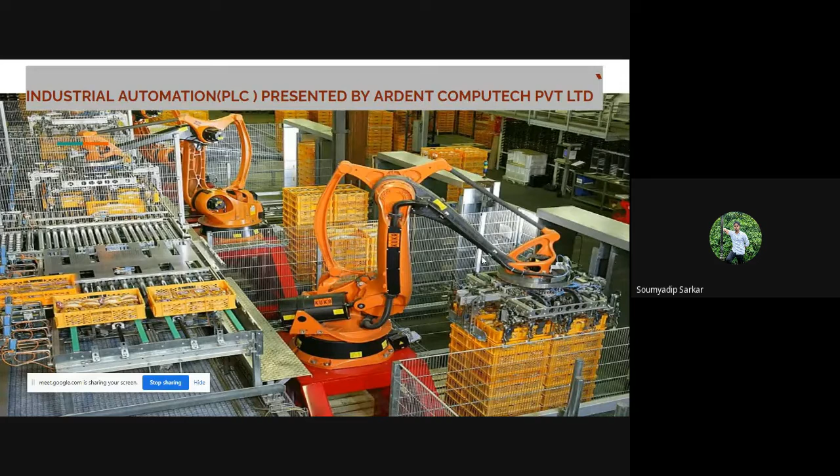So first tell me what you know about PLC. Let's discuss PLC first, then we'll jump into the later part, SCADA. What is SCADA? So tell me what you know about PLC. Does anyone have any knowledge about PLC? What are we about to study or get trained in this session?

You all know English, or should I communicate in another language, Hindi and Bengali? Are all of you comfortable with English?

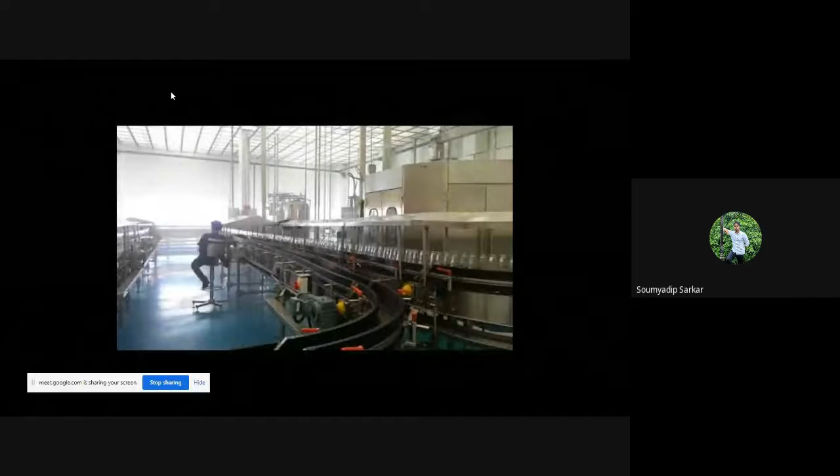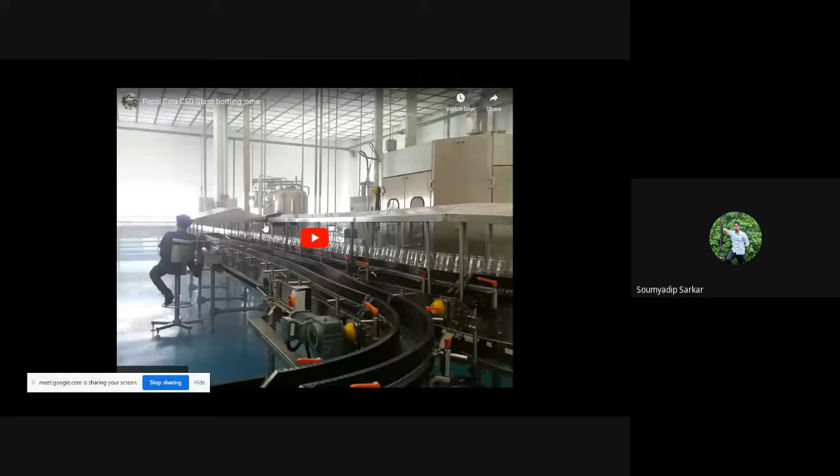Look very carefully. Here is one type of factory, and in this factory, the product is our Pepsi bottle. In this section, we see the empty bottles automatically getting filled first, then capped. By controlling this process, they use a PLC machine.

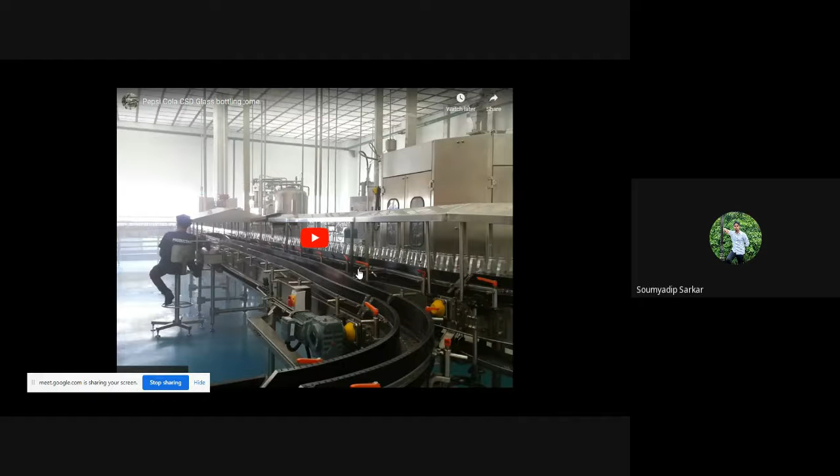First understand how that automation can be controlled, then we'll discuss why this machine is called a programmable logic controller. So first, see one type of automation: a Pepsi bottle getting filled and capped automatically.

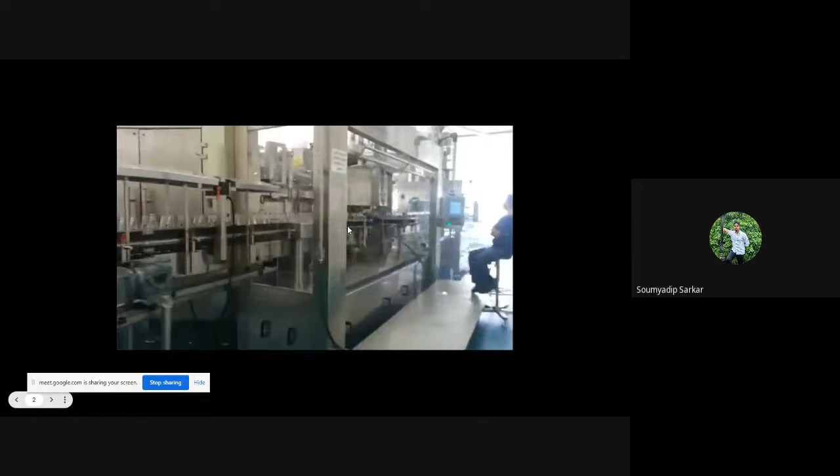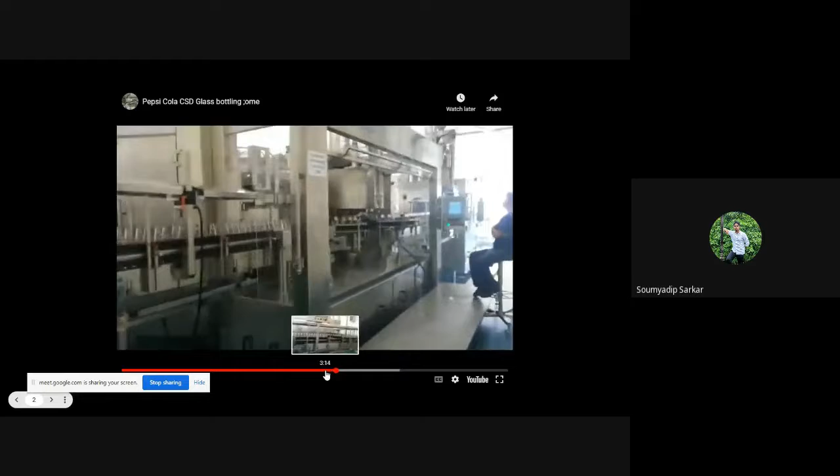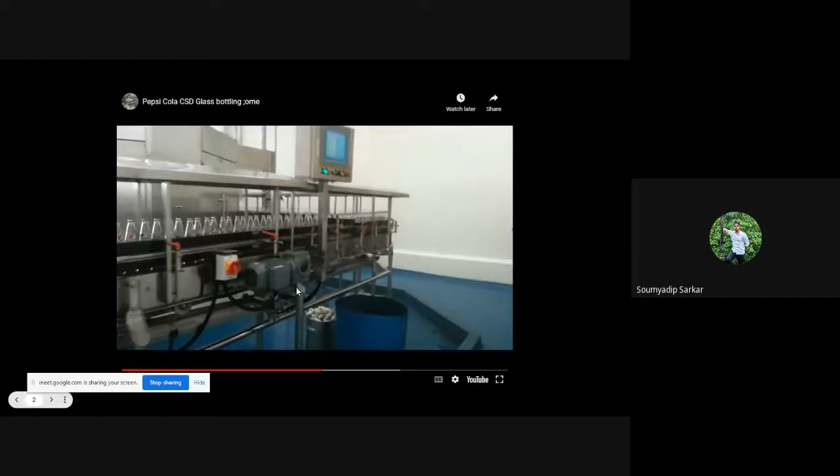What we are seeing here is a conveyor belt moving. That conveyor belt is moved with the help of installed motors. On that conveyor belt we have our empty bottles, and all the empty bottles go to the filling section.

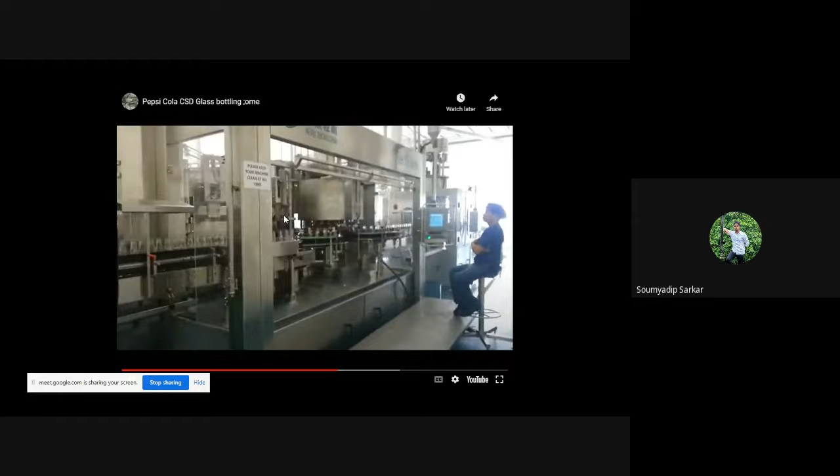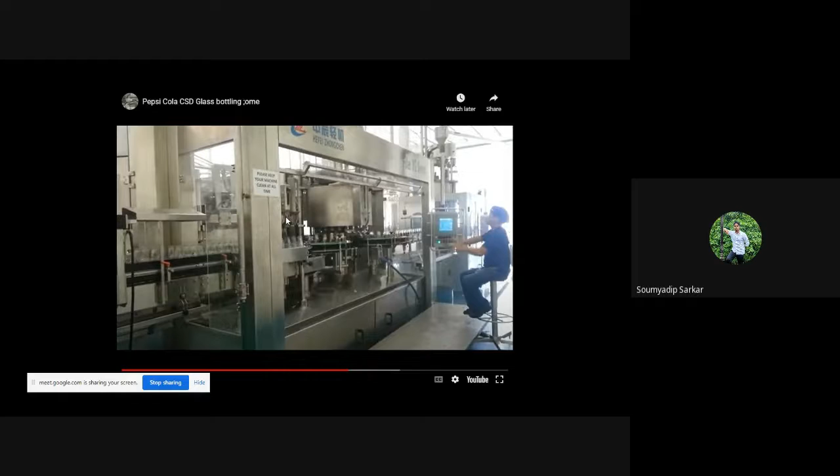First understand how they fill, then cap. All the process is done through automation, but it's actually carried out by machine—that's not entirely correct, since we have an observer who has the capability to change the input.

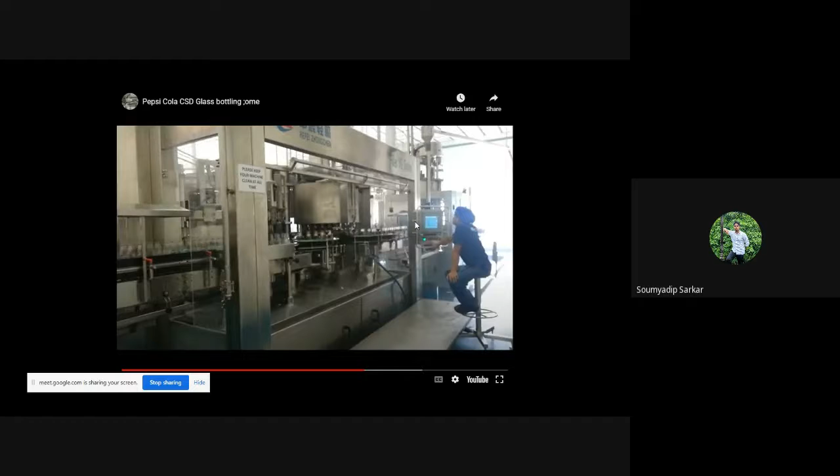This is called the HMI system, human machine interface. From that, they give input to change settings—suppose he needs to slow down the speed, he can control it.

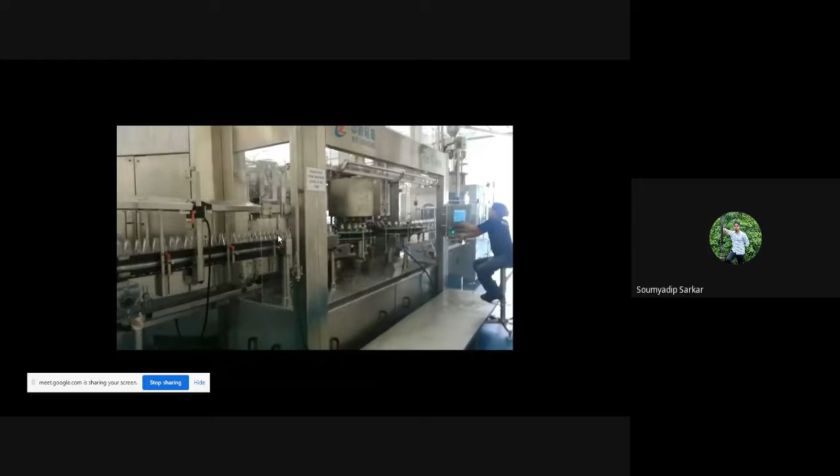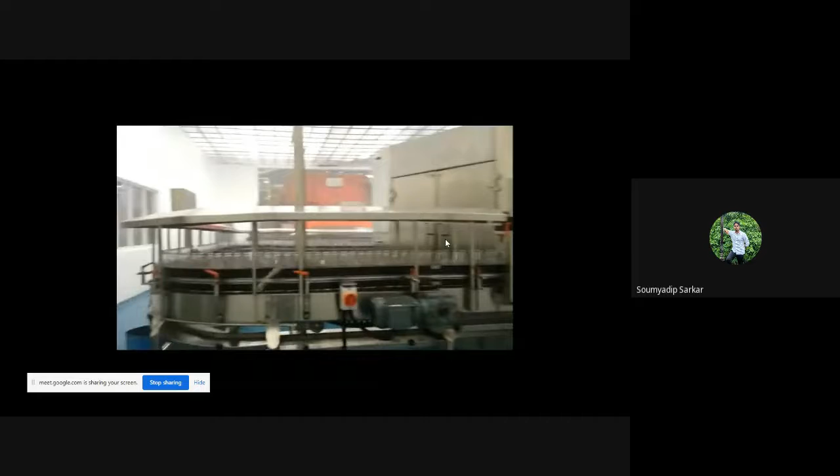Look carefully: all the empty bottles go to the filling section, and the filling section has the roundical process. They get attached to the filling section, and within one rotation they get filled, then go to the capping section. The capping section has one type of lever that moves up and down to cap them.

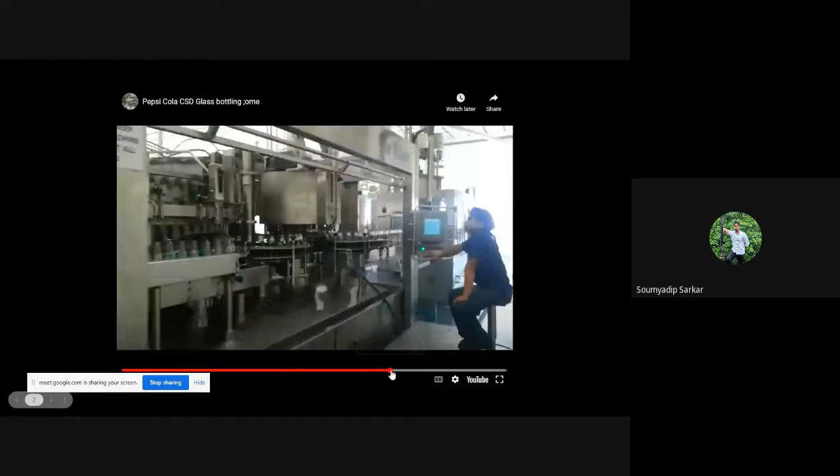So see this process: this is our conveyor belt, and this is the container. In this container we have our liquid, and on the outside of that container there are multiple filling sections that rotate.

All the bottles get attached to this filling section, and with the pressure set as needed, within one rotation they get filled. Then the filled bottle goes to the capping section, where a lever moves up and down to attach the cap.

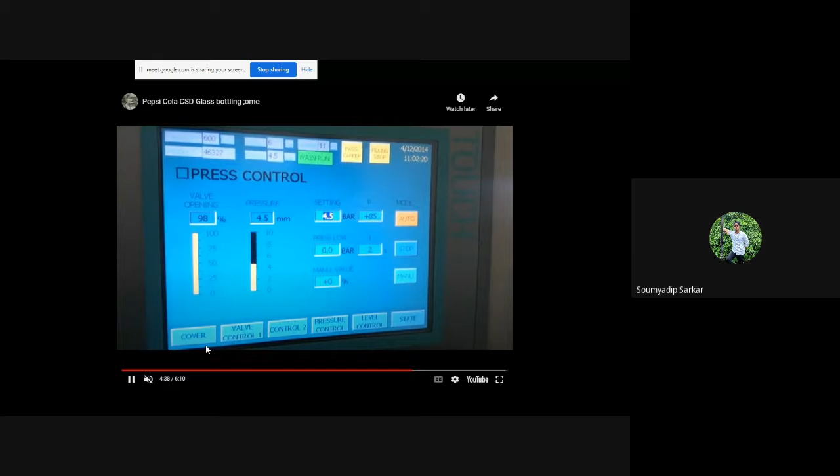So this is the controlling system. From this, you can control the valve, you can control the conveyor, and you can control the pressure as well.

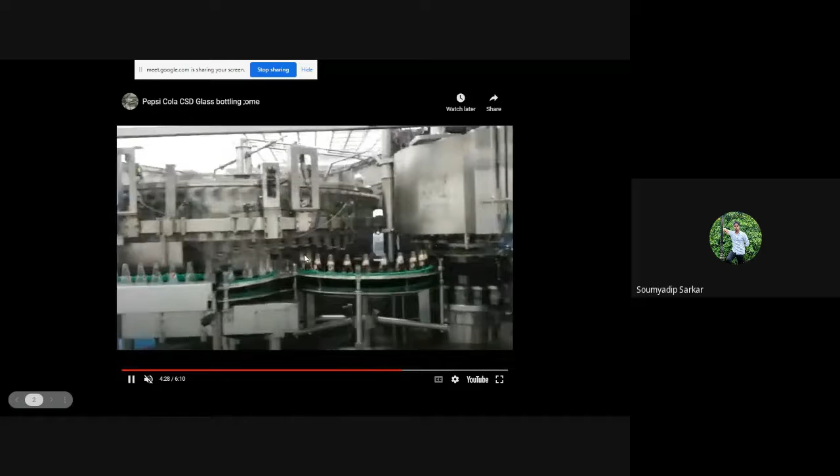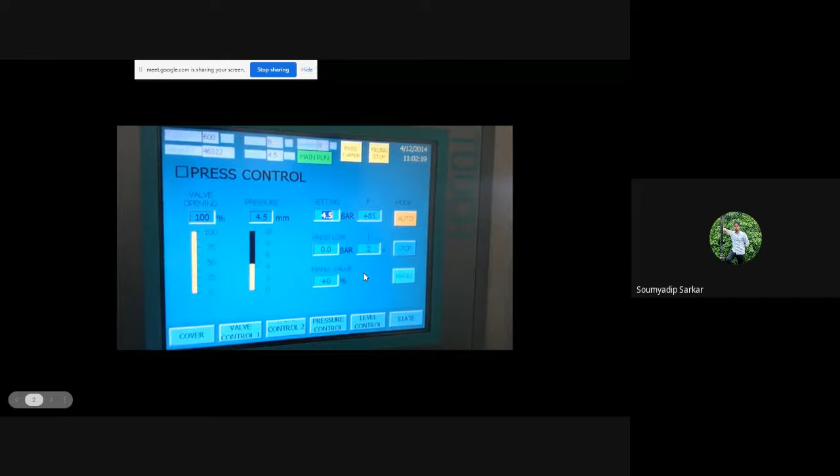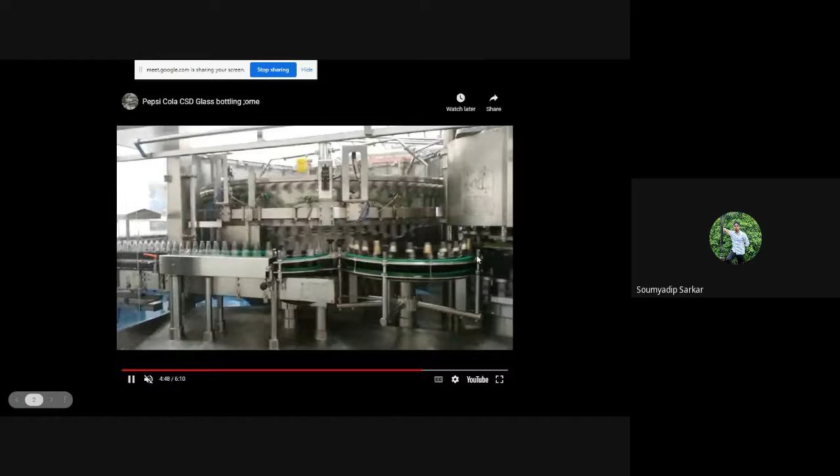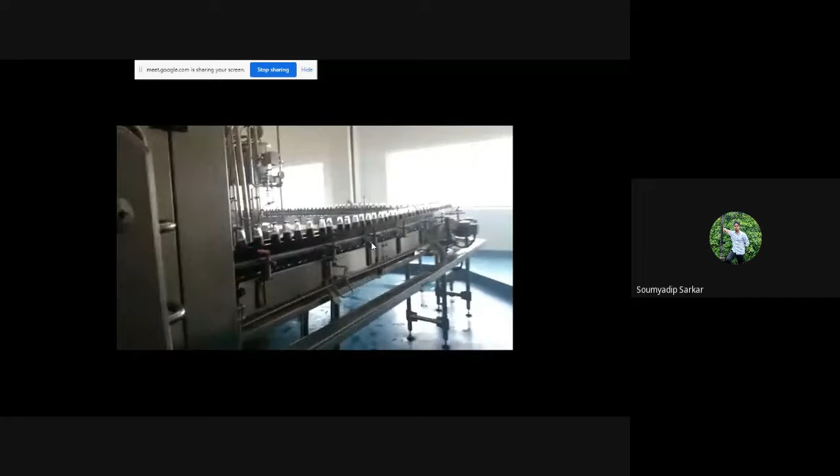Have you understood this process thoroughly? So then all the bottles go into the packaging section, they get filled and capped. If I created the same process manually, the product efficiency would not be as much as we have now. মানে, আমি যদি সেম প্রসেসকে মেশিনের সাহায্যে অটোমেটিক্যালি না করে ম্যানুয়ালি করতাম, তাহলে কি এতটা, ধরো 5 মিনিটে 1000 বা 500 খানা বোতল ভরা যেত ম্যানুয়ালি? না। So we need automation to gain our product efficiency, whatever is required there.

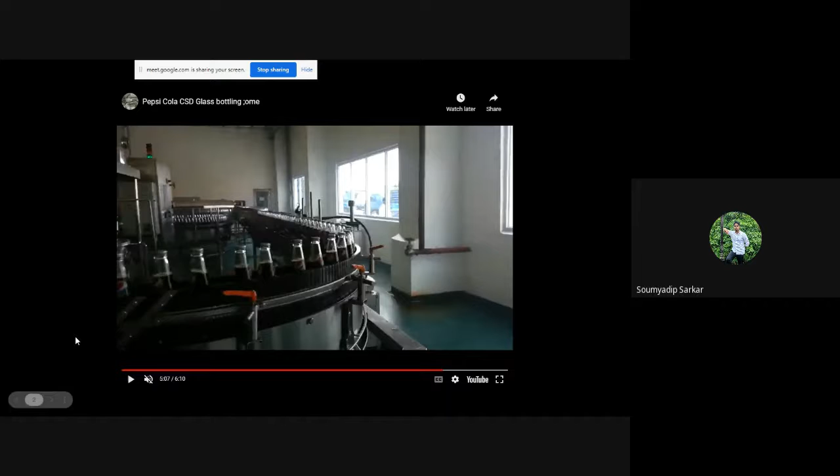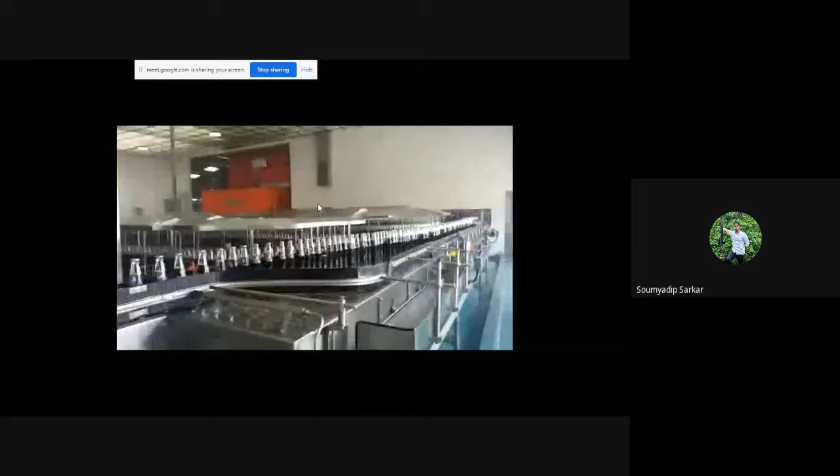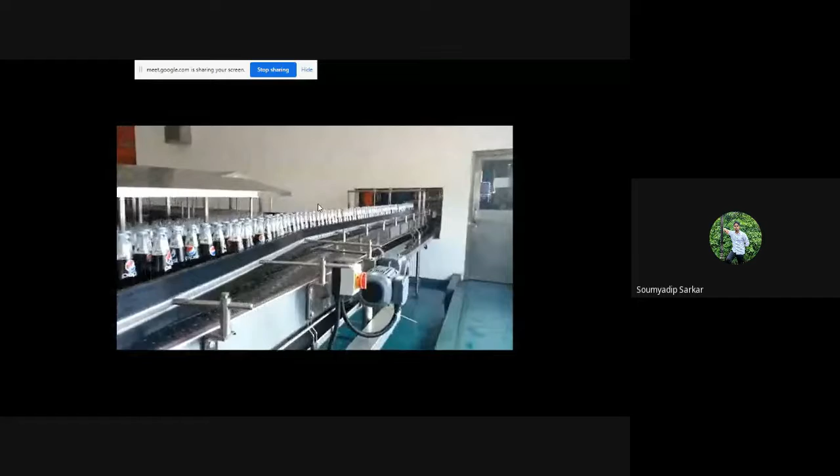So all the bottles then go to the packaging. They get contained and then they get distributed through vehicles in our shops.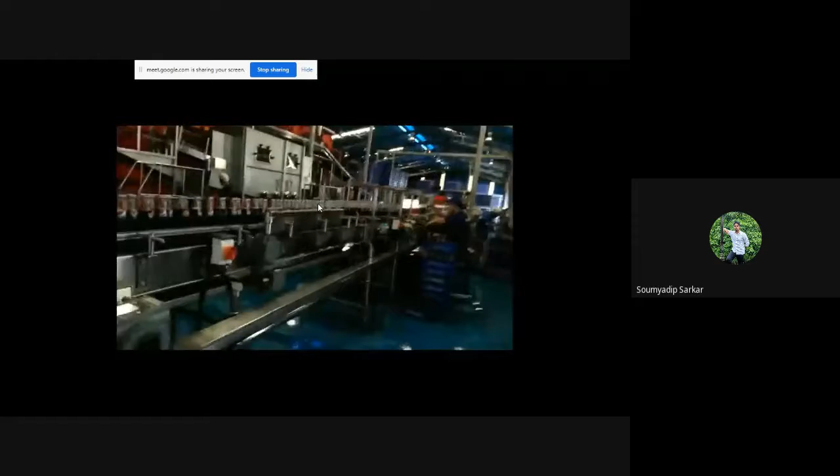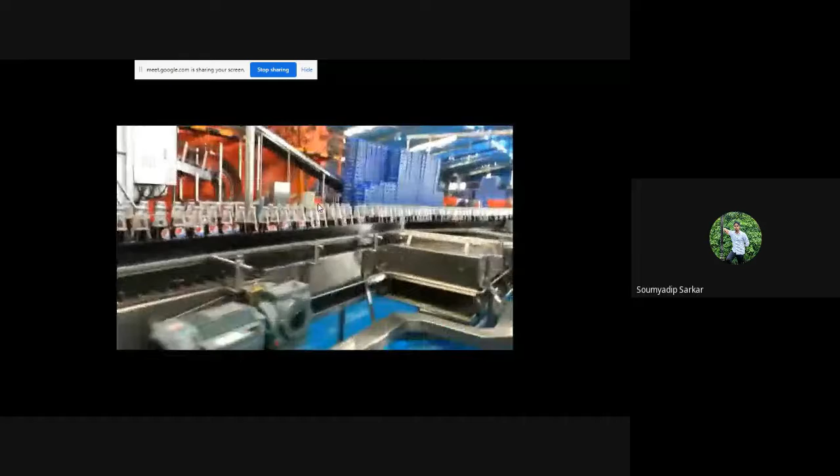Okay, what is this? This is actually... okay, wait one second, I have to attend one class, one call. Okay, wait one minute.

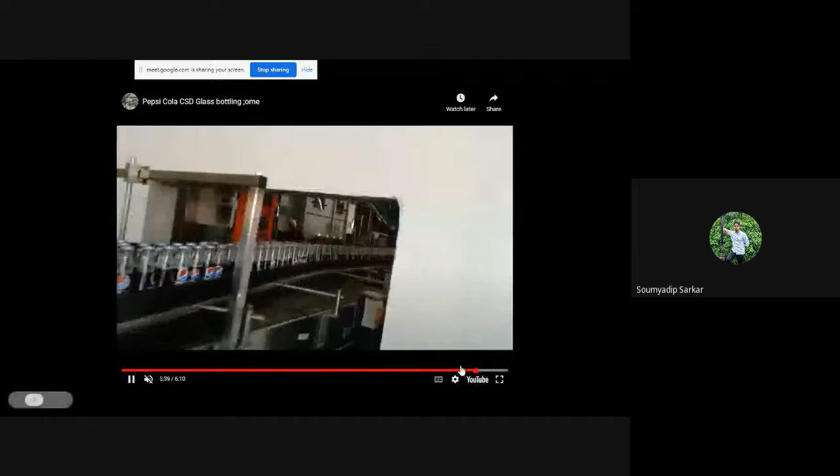Okay, so this is what they get checked, all the level gets filled up correctly or not, for level checkup. Or if there is, ধরো কোনো বোতল ক্র্যাক হয়ে গেছে, সো ওখান থেকে আবার তুলে নিয়ে আবার পাঠিয়ে দিতে পারে। And then the content, they get all that goes through that containing process.

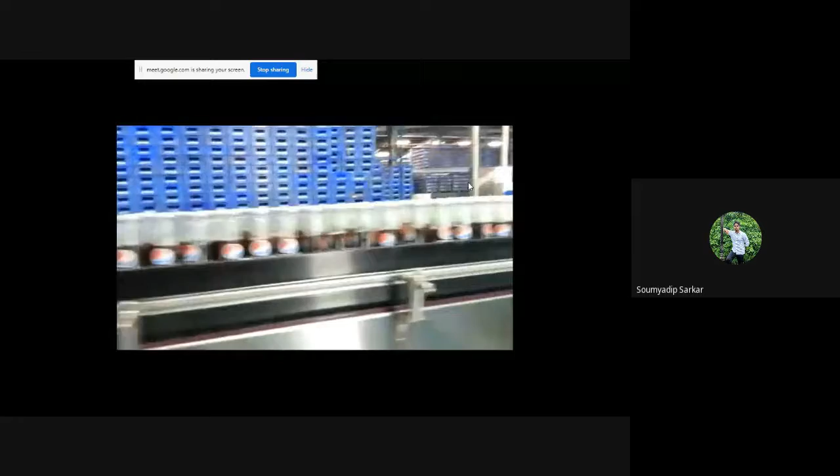Containing can happen automatically. Suppose there is a robotic arm there to carry, suppose 10 amount of bottles get contained through one container. So all this process can be automatically managed by the system.

So whatever we discussed here, now we have to understand what's behind this automation. We know that one machine we install there is called PLC, programmable logic controller. Whenever we call this a programmable logic controller, this is what this is. If we have that machine as a programmable logic controller, this is the reason we can use that machine to maintain this type of automation, whatever automation we require in the industrial system to control all the process. So why are we calling it a programmable logic controller, we have to understand this.

ফার্স্টে আমাকে বুঝতে হবে কেন একে প্রোগ্রামেবল লজিক কন্ট্রোলার বলছে। So how we can understand it, কিভাবে আমরা বুঝবো, to explain whatever automation system we saw, so we provide one type of layout diagram from the previous slide.

So what is this? This is the motor we fixed there. This is the conveyor belt. On that conveyor belt we have our empty bottles, and this is the filling section. By opening this valve and closing this valve, we can fill it.

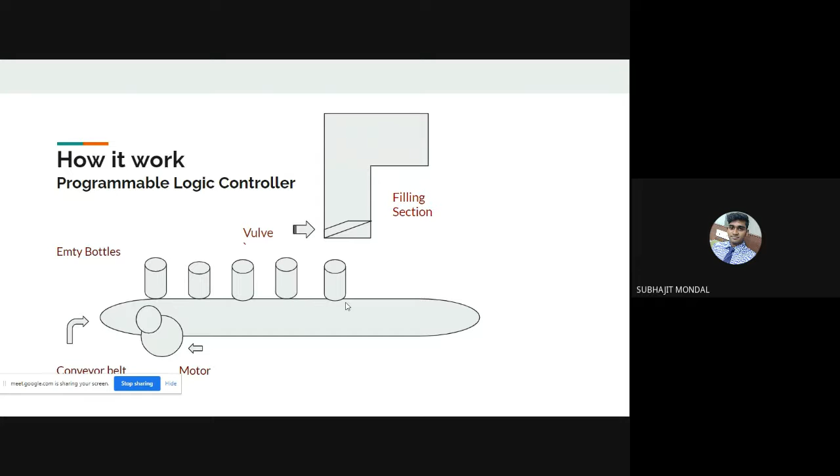Now tell me the input. Here see, there is a sensor - motion sensor might be input for stopping the conveyor, as it senses that the bottle comes in front of the valve. So this is one kind of input - sensor. Another input...

Another output for the valve here also. We have two inputs and two outputs. Another input is sensor. Yes, you get it right. Another input we have is that switching process of that motor to start.

So we install the push button we discussed. Push button is one type of input. Does push button get connected directly through motor? No. Does sensor get directly cut down that motor? No, because in between input and output, I have to control this output logically.

We have one type of logic. So we have the machine controlled by this programmable logic. So input gets connected to all the input ports, and output, whatever device we have to control, gets connected to the output port.

So switch as a push button and sensor. Suppose this is switch, this is sensor, suppose, okay. So I have another module as a center processing unit, and in that central processing unit, what is this? CPU. So in that central processing unit, we get to compile or process our program.

Which program? Whatever program we built through the device. So if you understand the programming logic, let's first discuss programming. So tell me, what is programming? Program is some kind of order or sequence of logical format that a computer can understand, our mindset of what we exactly want it to do or want to get from it.

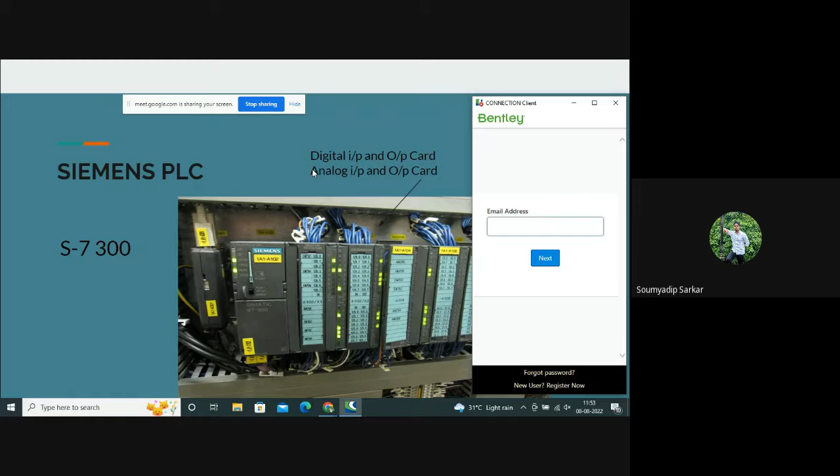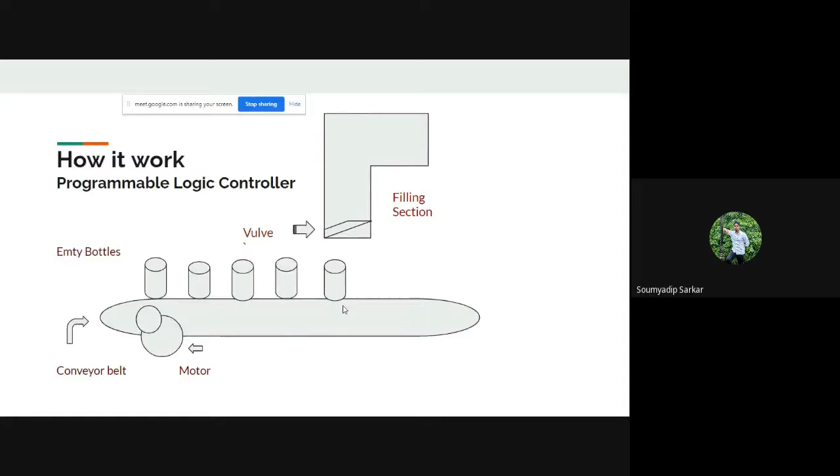Suppose we can control the level of any type of tank or temperature - that type of signal, if I need to control it, is controlled through analog signal. Digital means on and off, switching process, sensing process. Suppose this type of sensor - whatever input you describe there, that gets off this machine. So this type of input needs to be controlled by digital input card.

What is the input card and output card? Input card actually has controlling power over the input port where that device gets attached.

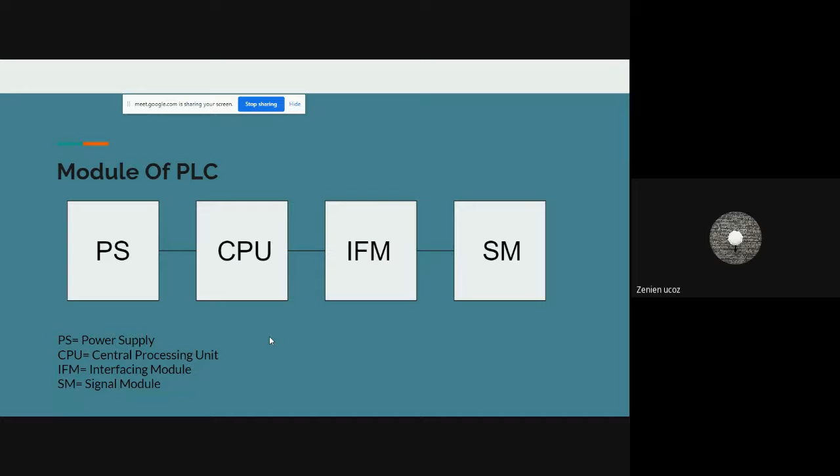আইএফএম, ইন্টারফেসিং মডিউল। 5 মিনিটে ব্রেক নিতে চাও নিতে পারো। আমি এখানে ক্রিয়েট করে পাঠাচ্ছি, সফটওয়্যার লিঙ্কটা পাঠিয়ে দিচ্ছি গ্রুপে।

দুটো সফটওয়্যার ইনস্টল করতে হবে শিখতে গেলে। একটা হচ্ছে স্কাডা, আরেকটা পিএলসি। স্কাডা কি জিনিস আমি এক্সপ্লেন করে দেবো।

হোয়াটসঅ্যাপ, ব্যাচের নামটা কি ছিল দেখে নিন গ্রুপে। জেআইএস।

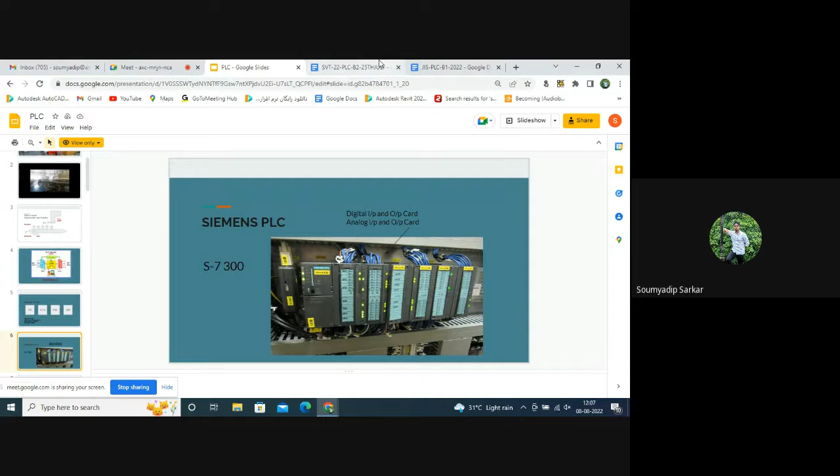Now, IFM system. So IFM is what? IFM system here. IFM system, they provide that IFM system as an interfacing module. Okay, so what is interfacing module? To understand this, first understand what all type of interfacing is actually happening.

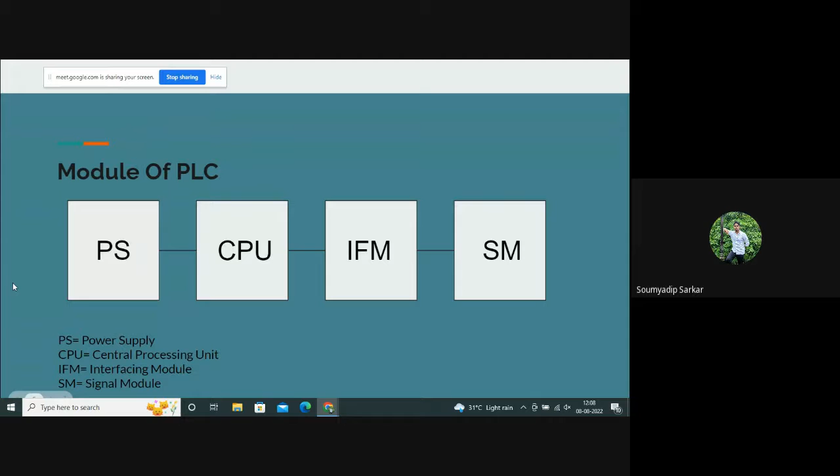We have SM system, signal module. By that signal module, input from that input device interface and output device interface is actually there. Not that type of interface. Except input module and output module, all the interface can be done by IFM.

Input device and output device যেটা কানেক্টেড আছে সেটাও একটা ধরনের ইন্টারফেস, কিন্তু এই ইন্টারফেসটাকে আমরা আইএফএম সিস্টেম দিয়ে ডেসক্রাইব করছি না। কেন করছে না? Why they doesn't describe that IFM? Because that system, that interface can be done through our SM module, signal module.

Okay, so now we have to understand the IFM module. So IFM module is what? IFM module gets connected from one PLC to other device, not input device and output device, because that interface can be controlled by SM module. Understand? Now, what type of other interface can be done?

That type of interface, first interface is actually we have to provide our programming into our CPU. Programming kinds of things have to be sent in the CPU, so then they can control. প্রোগ্রামটাকে তো পাঠাতে হবে, সো কোথা দিয়ে পাঠাবো? So that type of wired interface is happening through IFM. IFM actually there to load the programming, first interface.

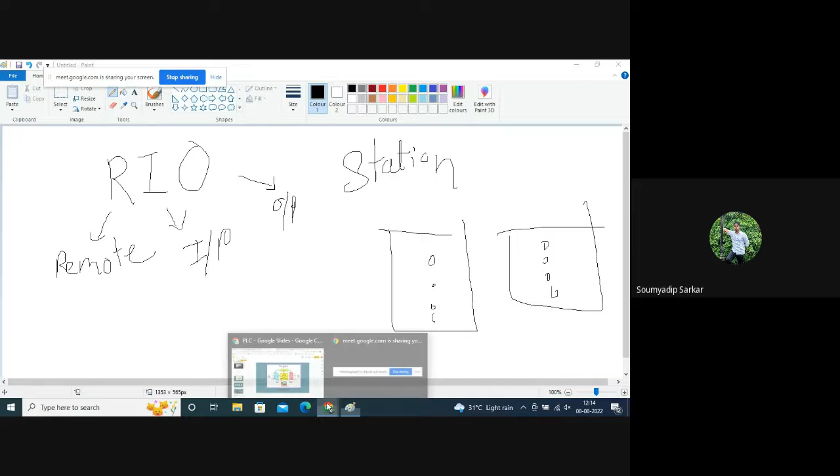So they provide extra input connection, extra output connection. If I connect it through the main PLC to the RIO station from wire, through the IFM interfacing module, I can control extra input and extra output. Same logic, whatever logic we have in our main PLC, the same logic can be done over the different extra input and extra output.

Why is this called remote? Because the main PLC, wherever that remote system is installed further, means suppose in an industry, in a factory.

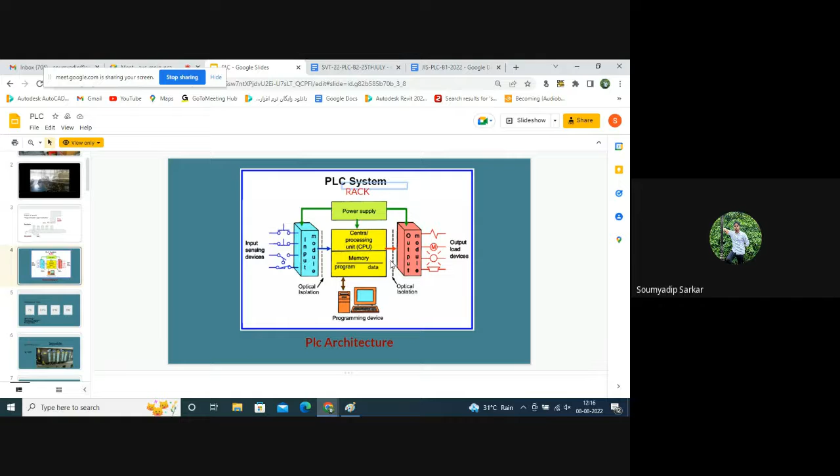Okay, so this system, this is the architecture system, and in that architecture system we have the rack. We have to understand the rack system. A rack is actually the holding concept, a construction of the holding concept. What type of holding can be made there? That module system there.

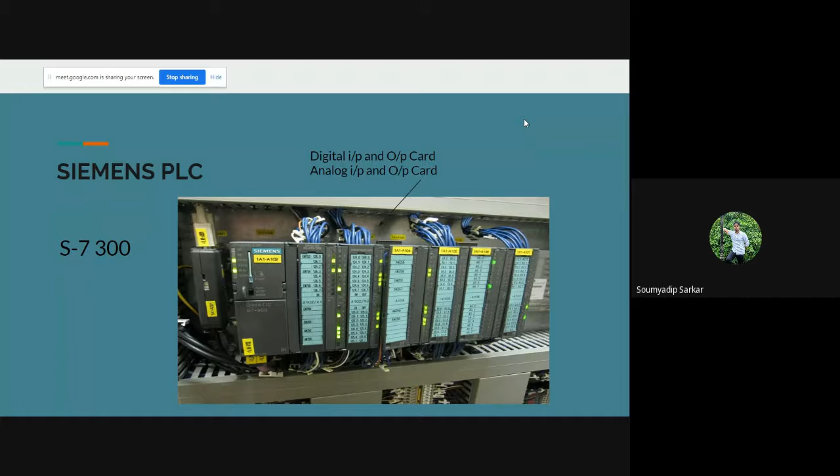Suppose this is our panel box. This is the S7 300. What is the difference to S7 400? What is actually S7 300?

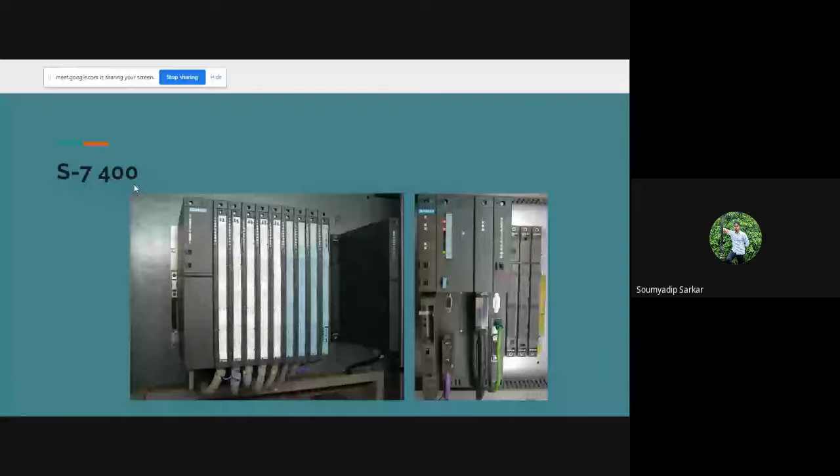No, first Siemens basic PLC machine they provided as S7 200. S7 200 is actually obsolete from the market, they don't manufacture it. Why do you find S7 200? Whatever industry installed it, they don't detect it, they continuously keep running. So a running machine can be seen as S7 200. Otherwise, it doesn't purchase the S7 200 because they closed the manufacturing for S7 200.

So the base machine is S7 300. We explain the S7 300 machine structure. So, S7 400, what is the S7 400? The upgraded version. What is the difference? Whatever difference we have, as with a mobile phone, suppose why do you purchase a different model from the same company. Suppose Apple provides the Apple 13. Why next year do you purchase the Apple 14?

Because they specifically build one type of extra feature. Whatever they increase, the chip, they increase the camera quality.

So here also they increase the compiling system of the CPU. They increase the input output system and different type of features. That's how we can build, that's how we can buy the system. Otherwise why would you buy the new system?

So this is the S7 400. S7 400 is the upgraded version of S7 300. This is actually the PS power supply CPU. Then extra, they can provide all type of IFM interfacing module.

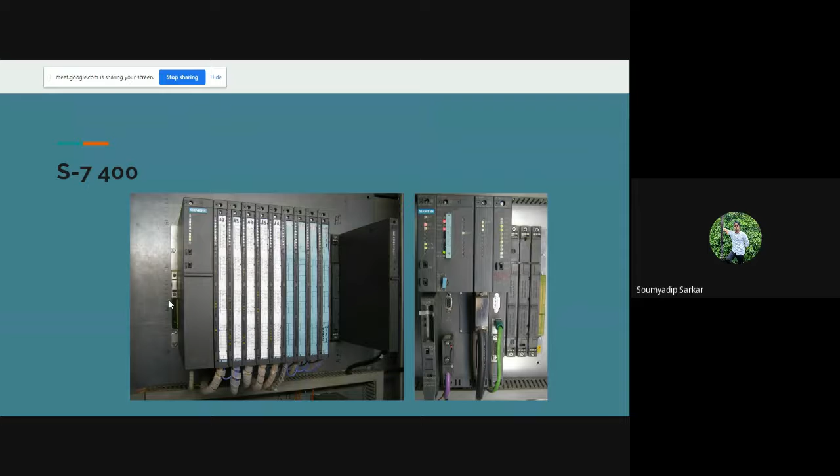In the second half, we will directly go through the concept of how basically I start the concept, how we can create the program. So this is actually the gist.

The full form of SCADA is Supervisory Control and Data Acquisition System. So what is actually Supervisory Control and Data Acquisition System? In one word, I can explain Supervisory Control and Data Acquisition System as a monitoring system.

Okay, you have the controlling room. From the controlling room, you can monitor every system, every process. So suppose there is one type of process. Suppose this is a pump, and this is one type of liquid, and the liquid is used in a system. If that liquid gets to our lower level, automatically the pump fills this system, and this whole process gets controlled by PLC.

Suppose the lower level gets sensed, so the process starts the filling process. If the high level gets sensed, the process stops, and whatever liquid they use for another section, that valve gets open. So this thing can be controlled through PLC, one type of process.

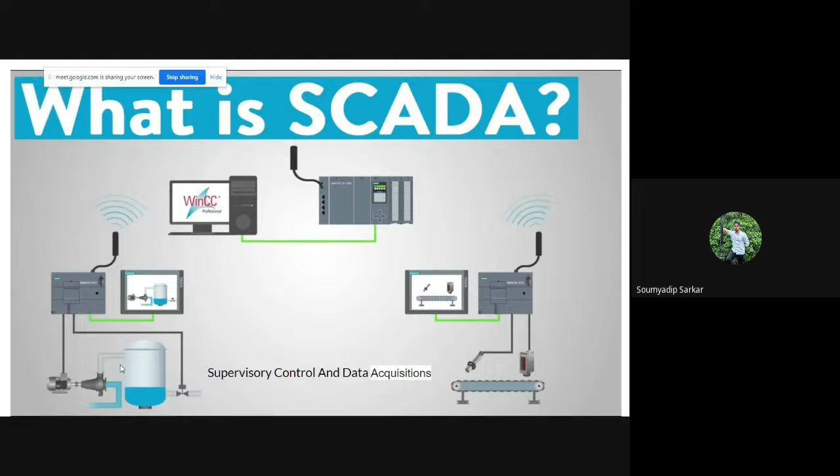বুঝতে পারলে? তো SCADA সিস্টেমটা দেখবো পরে, সুপারভাইজারি কন্ট্রোল এন্ড ডেটা অ্যাকুইজিশন সিস্টেম। সো নেক্সট ধাপে আমরা প্রোগ্রামিংটা স্টার্ট করবো, এবং প্রোগ্রামিং স্টার্ট করতে গেলে কতগুলো বেসিক আইডিয়া জানা দরকার, সেই বেসিক আইডিয়া থেকে স্টার্ট করবো।